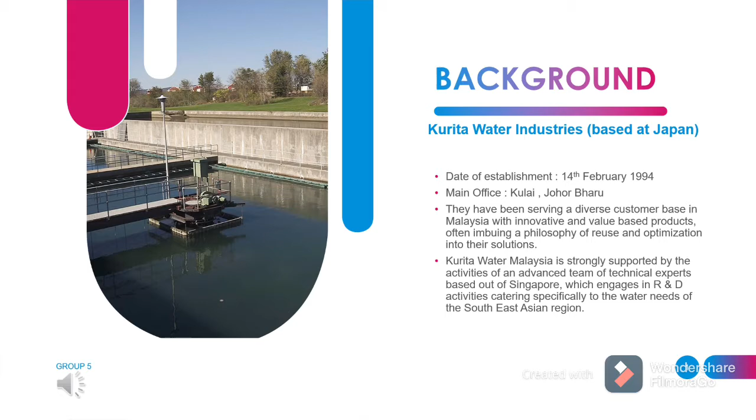KURITA Water Malaysia is strongly supported by the activity of an advanced team of technical experts based out of Singapore, which engage in R&D activity catering specifically to the water needs of the Southeast Asian region.

So now we move to the first process for the water treatment plant, which is water intake. The water for the water treatment plant is taken from the nearest local river, lake and reservoir. The purpose of an intake system is to reliably deliver an adequate quantity of water of the best available quality. An intake system must possess a high degree of reliability and be able to supply the quantity of water demanded by a water utility under the most adverse conditions.

For a large capacity water treatment plant, a detailed survey including hydraulic calculation, mapping, pumping station, source of power supply and other scope have to be done for designing the intake plant.

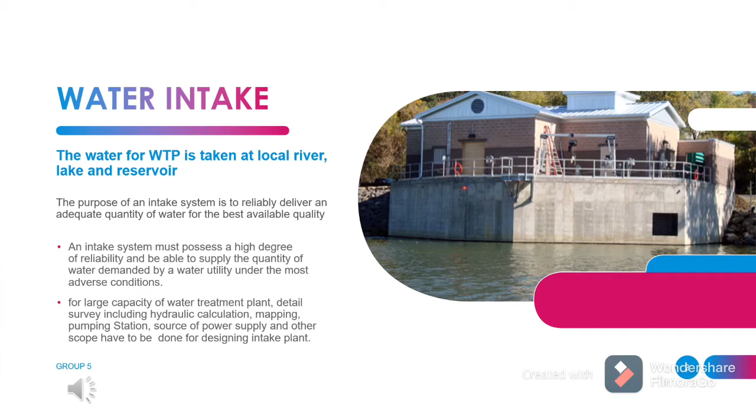So now we talk about aeration of the KURITA company. Aeration is often the first major process at the treatment plant. Aeration brings water and air in close contact in order to remove dissolved gases, such as carbon dioxide, and oxidize dissolved metals. During aeration, constituents are removed or modified before they can interfere with the treatment process. Constituents commonly affected by aeration are volatile organic chemicals such as benzene, which can be found in gasoline, ammonia, chlorine, carbon dioxide, hydrogen sulfide, methane, iron, and manganese.

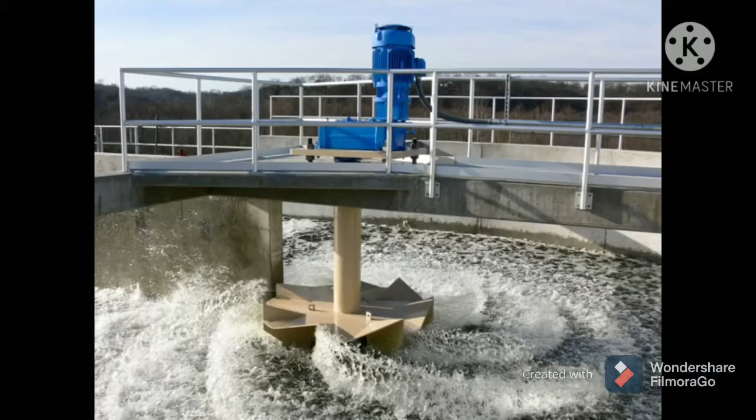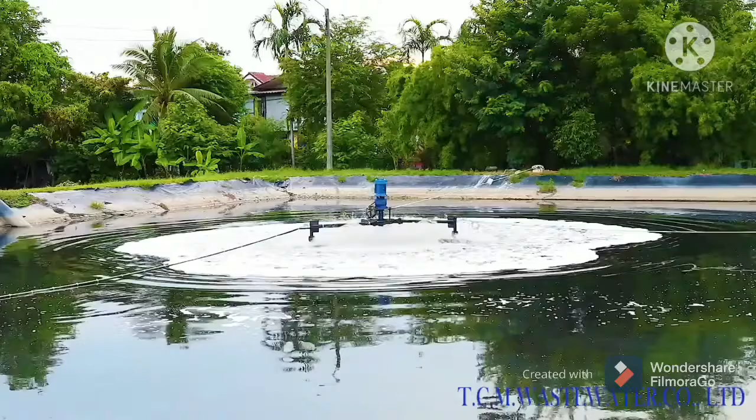This is the aerator that KURITA company uses. The surface aerator pushes water from under the water surface up into the air. Then, the droplets fall back into the water, mixing in oxygen. The jets of water break the surface with varying degrees of force. Aeration brings water and air in close contact by exposing drops or thin sheets of water to the air or by introducing small bubbles of air and letting them rise through the water.

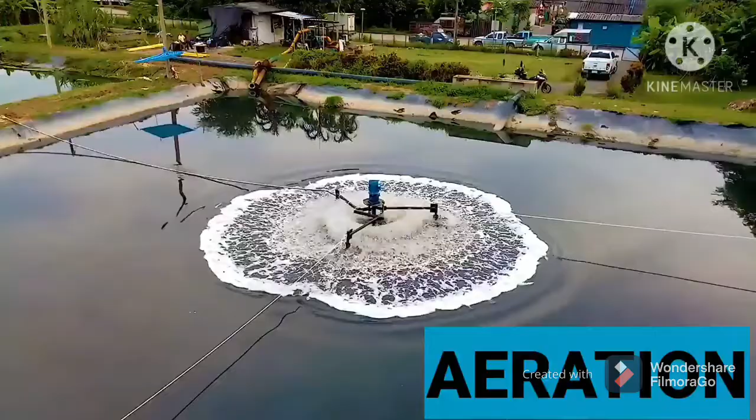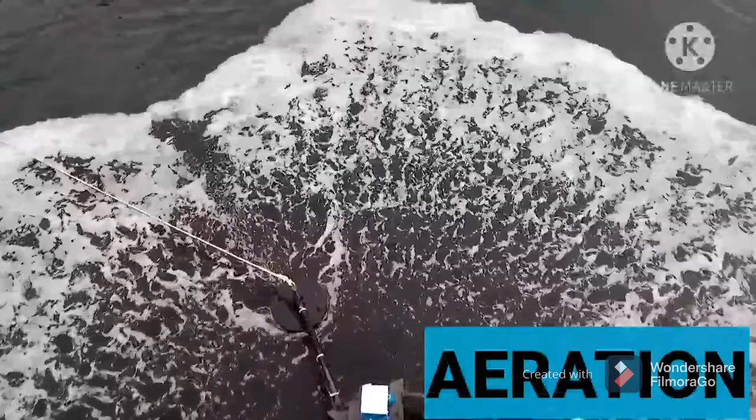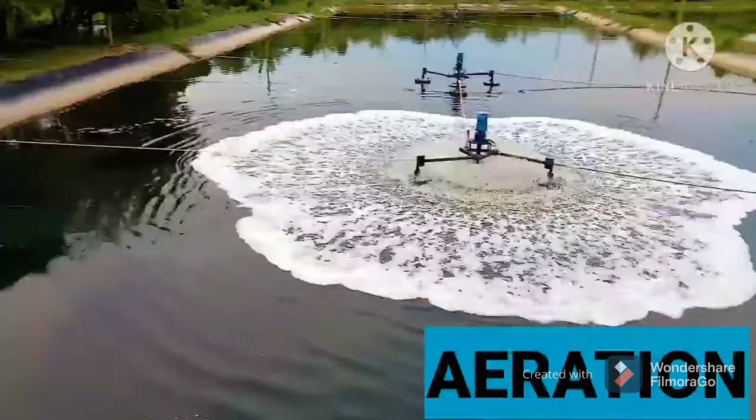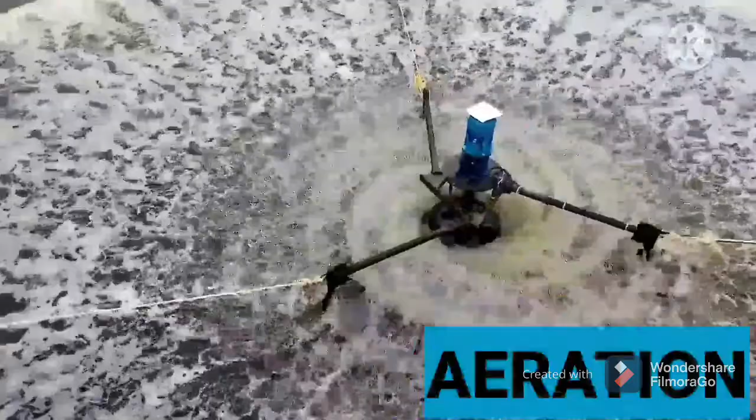The scrubbing process caused by the turbulence of aeration physically removes dissolved gases from solution and allows them to escape into the surrounding air. Aeration also helps remove dissolved metals through oxidation, the chemical combination of oxygen from the air with certain undesirable metals in the water. Once oxidized, these chemicals fall out of solution and become particles in the water and can be removed by filtration or flotation. The efficiency of aeration depends on the amount of surface contact between air and water, which is controlled primarily by the size of the water drop or air bubble.

The next process is coagulation. For the coagulation process, KURITA company proposed a water treatment chemical, KURITA ZE, to promote the coagulation effect of the chemicals used at the plant. Coagulation is a process used to neutralize charges and form a gelatinous mass to trap particles, thus forming a mass large enough to settle or be trapped in the filter.

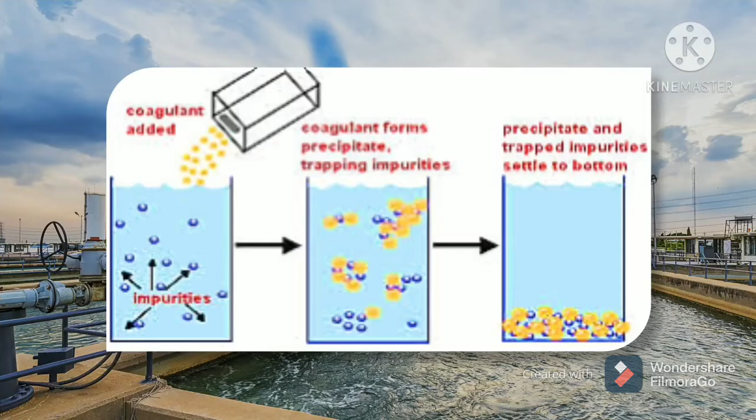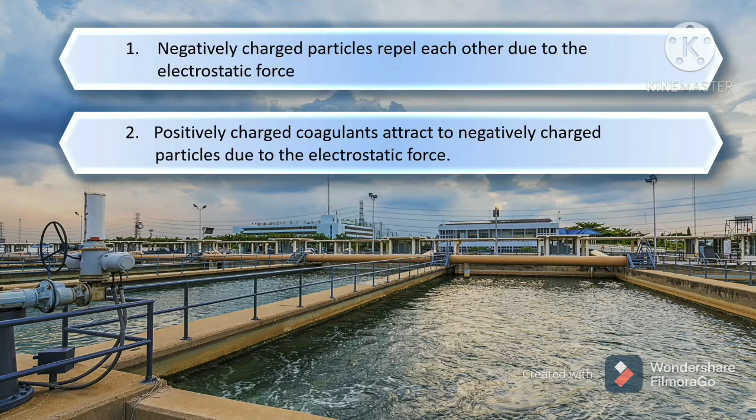Coagulation destabilizes the particles' charges. Coagulants with charges opposite to those of the suspended solids are added to the water to neutralize the negative charges on dispersed non-settleable solids such as clay and organic substances. Once the charge is neutralized, the small suspended particles are capable of sticking together. The slightly larger particles formed through this process are called microflocs and are still too small to be visible to the naked eye.

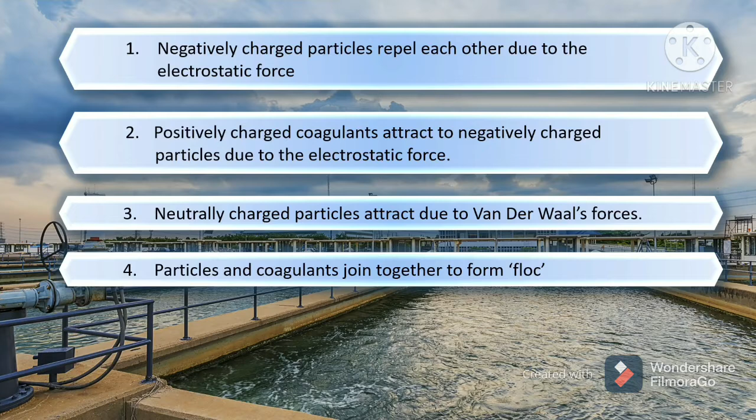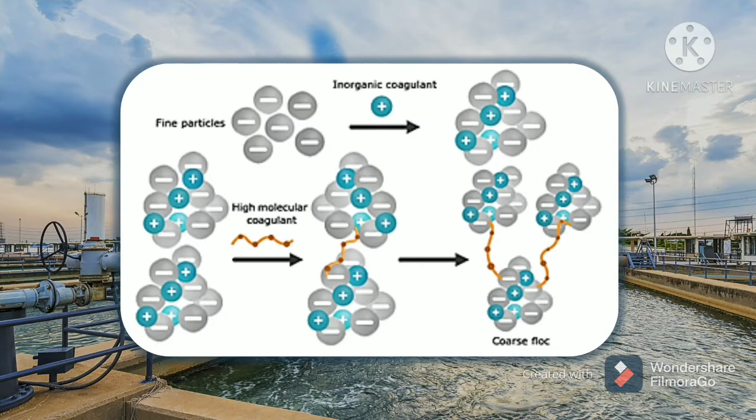A high-energy rapid mix to properly disperse the coagulant and promote particle collisions is needed to achieve good coagulation and formation of the microflocs. Overmixing does not affect coagulation, but insufficient mixing will leave this step incomplete. Proper contact time in the rapid mix chamber is typically 1 to 3 minutes.

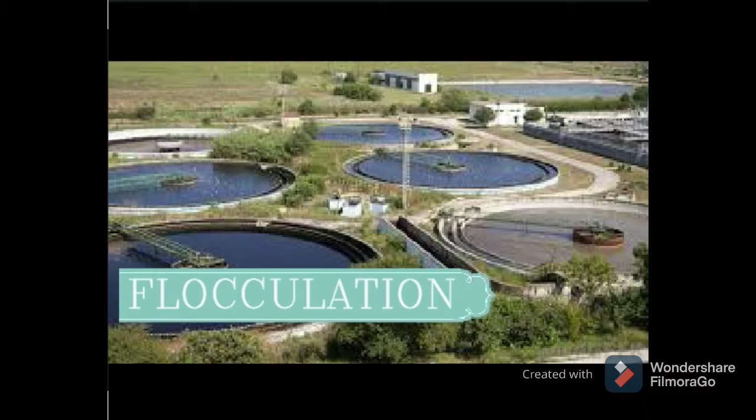In this video, I want to explain about flocculation, sedimentation and filtration.

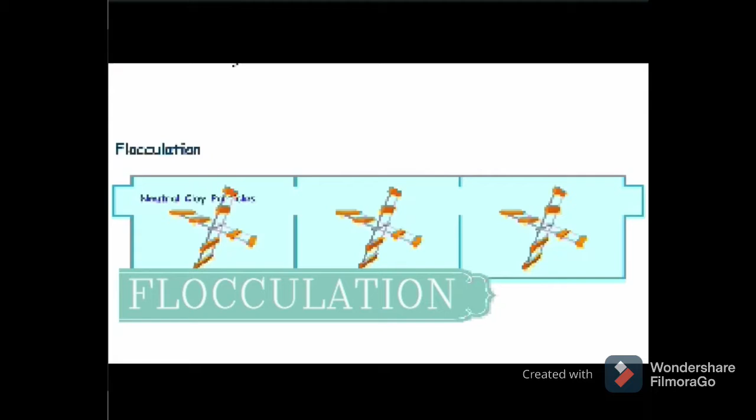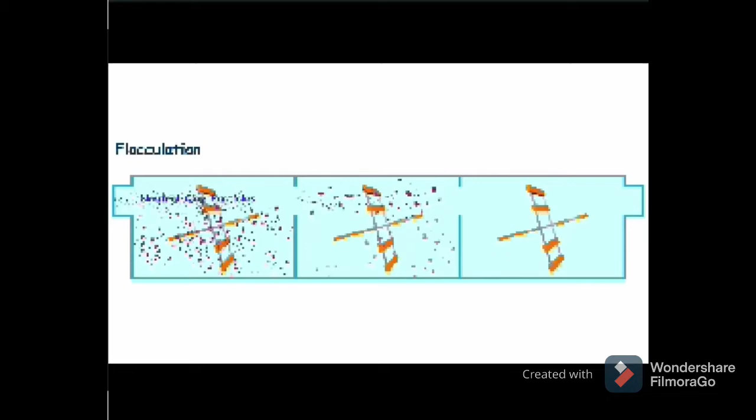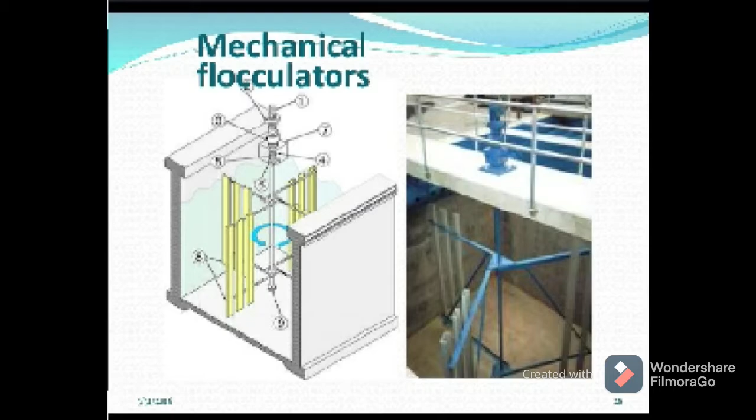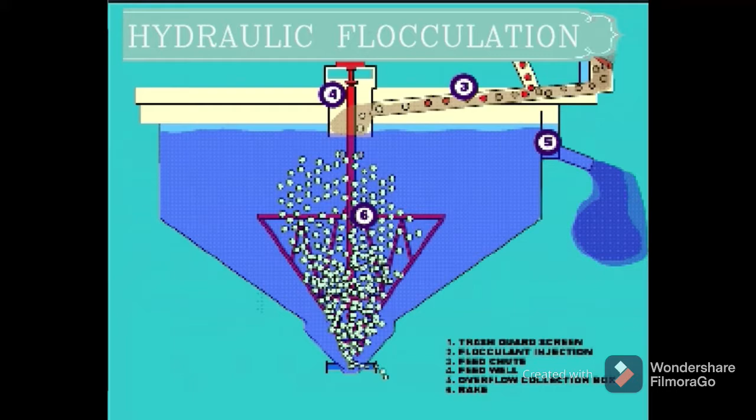First, I will explain the flocculation process. Flocculation is a process where particles stick together to form a floc due to the chemical reactions from coagulation. Flocculation is a slow mixing process because it relies on turbulence to form a floc. There are two types: mechanical flocculation and hydraulic flocculation. For KURITA water, hydraulic flocculation is used because it is simplest to construct and operate.

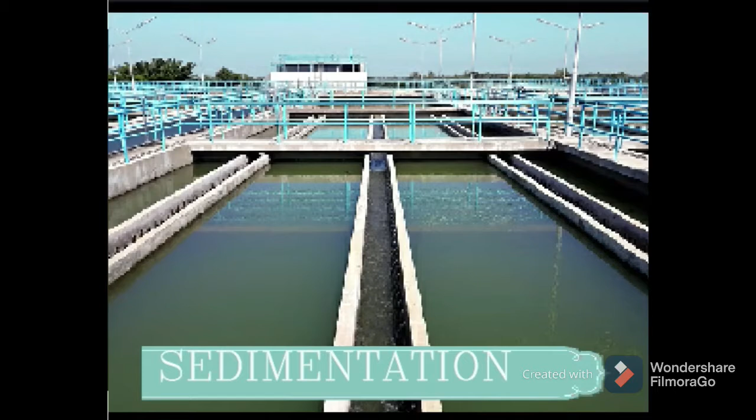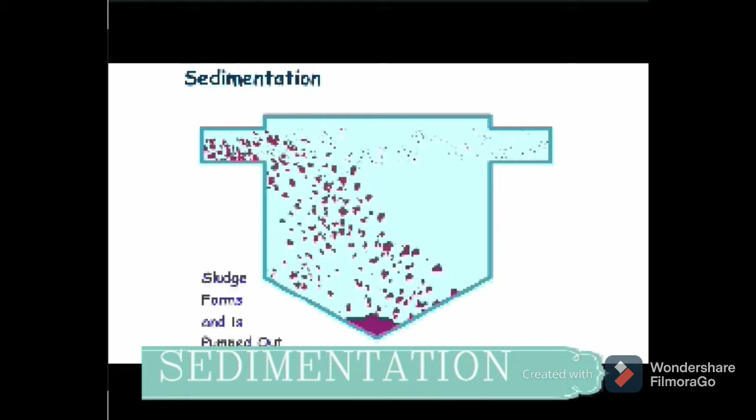The next process is sedimentation. Sedimentation is a process where suspended material from the flocculation process is removed. It depends only on gravity. There are three types of sedimentation: type 1, type 2, and type 3.

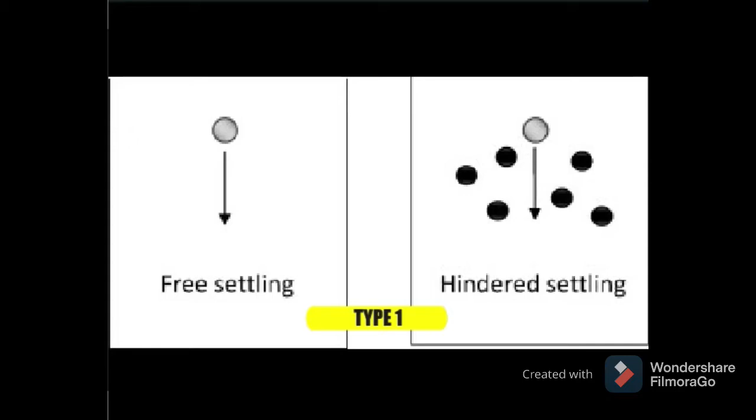In type 1, particles tend to settle as individual particles without colliding with other particles. There is no change in size and shape in type 1.

Type 2 sedimentation is where particles are in the middle of flocculating. It happens when particles start to change to different sizes and shapes.

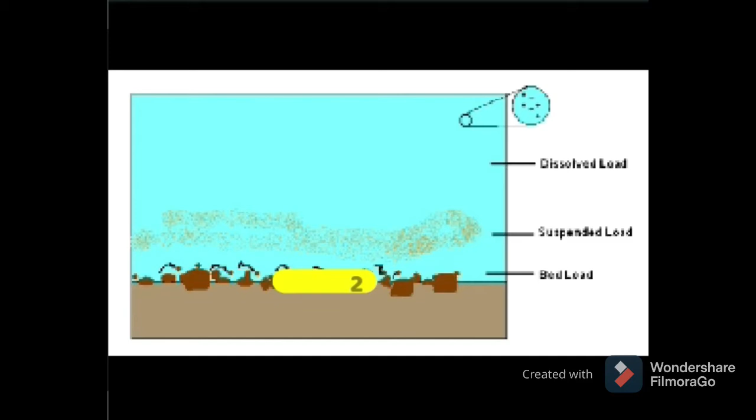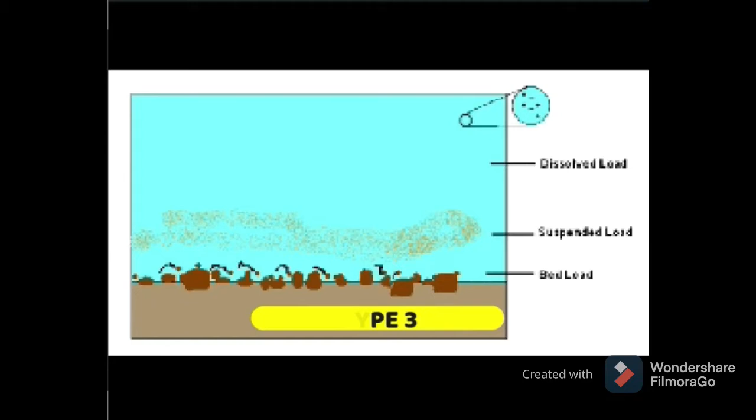The last type is type 3, where the particles have changed into a bigger size and shape and will sink to the bottom of the tank. This happens because of the higher concentration of particles, causing a layer called a blanket to form at the bottom.

The next process is filtration. Water from the sedimentation process passes through a filter made of sand. The floc and impurities that are bigger than the sand get stuck, producing clean water.

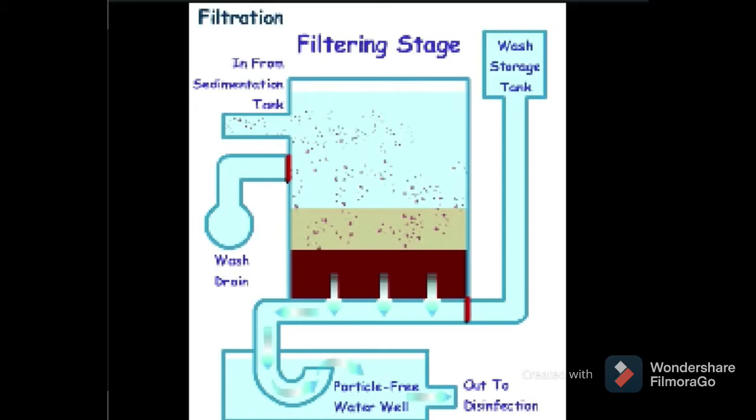There are two types of filtration: pressure filter system and gravity filter system. In a pressure filter system, water passes under high pressure through a closed cylinder.

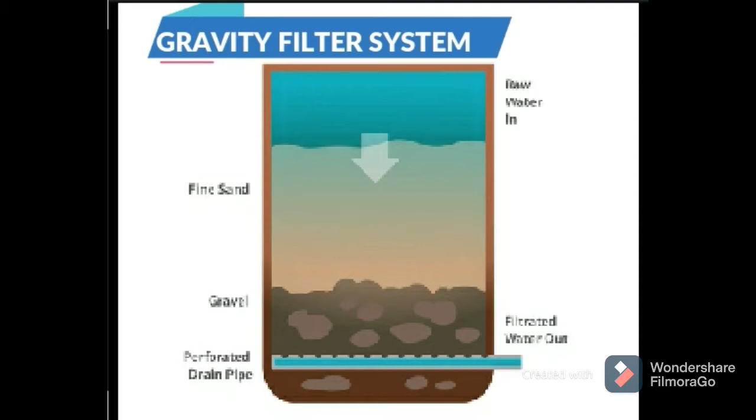In a gravity filter system, there are two types of filter: rapid sand filter and slow sand filter. The rapid sand filter's capacity increases by increasing the size of the sand grain. There are two operations in the rapid sand filter: filtering and backwashing mode.

In filtering mode, water is applied to the top of the filter and flows downward. In backwashing mode, it is used to clean the rapid filter so it becomes more efficient.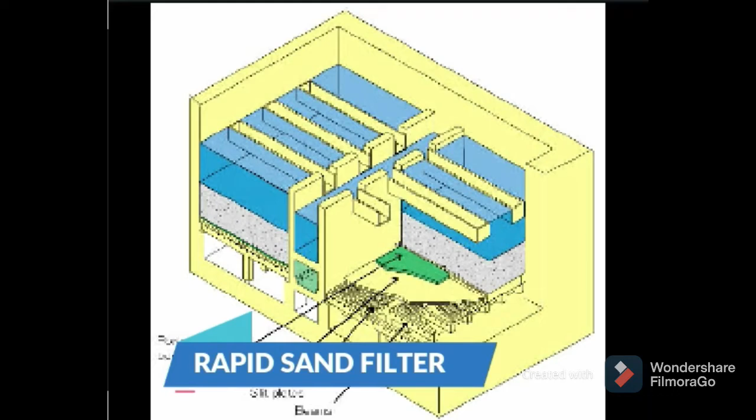The water cleans the filter and erodes solids from the filter medium, expanding the filter bed and transporting the solids towards the backwash trough. A slow sand filter is where water passes through the sand slowly.

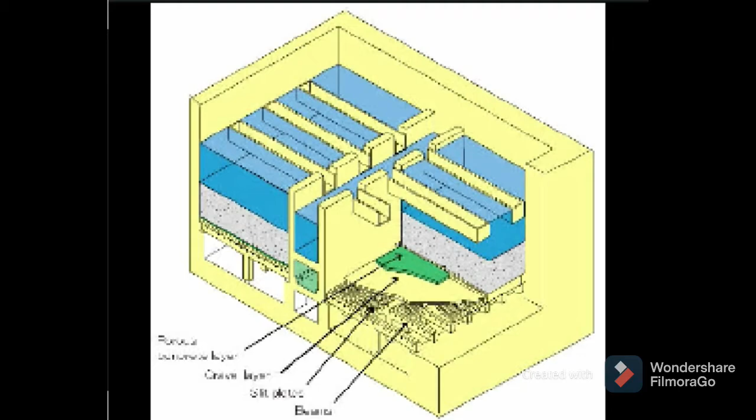Disinfection is the process which involves the elimination of most pathogenic microorganisms on inanimate objects. Chemicals used in disinfection are called disinfectants. Different disinfectants have different target ranges, and not all disinfectants can kill all microorganisms. The important thing is to minimize the number of organisms in the population worldwide. The method of disinfection is used internationally for the safety of humans to decrease the scale of disease transmission.

Common disinfectants include aldehyde, alcohol, and phenol. 70% aqueous alcohol is more effective at killing microbes, and 70% ethyl alcohol is used as an antiseptic on skin.

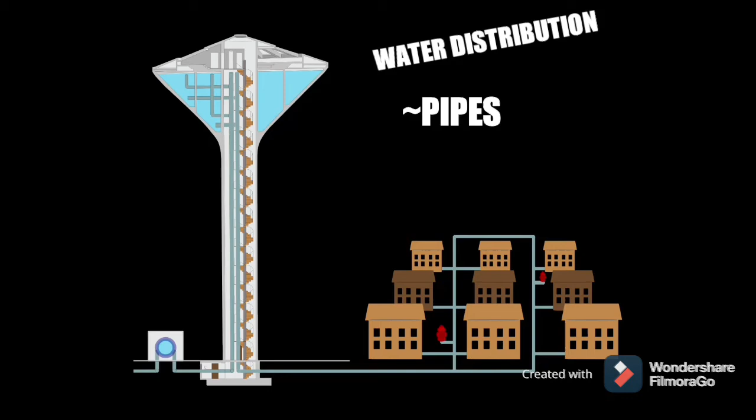Water distribution. A water distribution system consists of an interconnected series of components. They include pipes, storage facilities, and components that convey drinking water. Public water systems depend on the distribution system to provide an uninterrupted supply of

pressurized, safe drinking water to all consumers. Distribution systems may carry water either from the treatment plant to the consumer, or from the source to the consumer when treatment is absent.

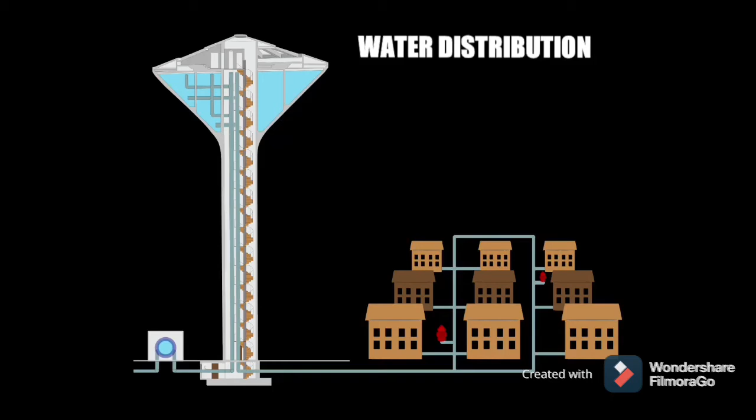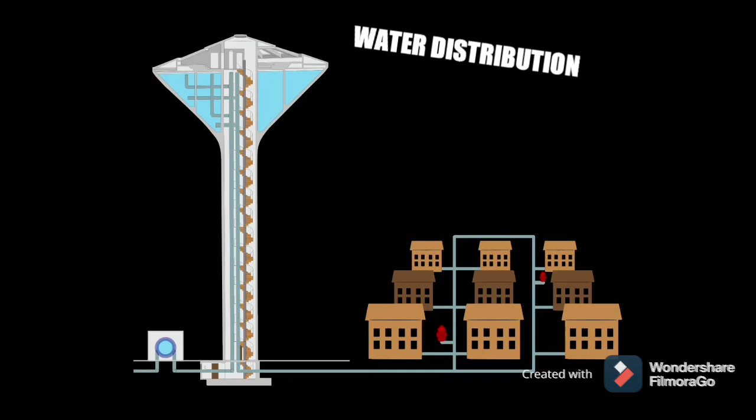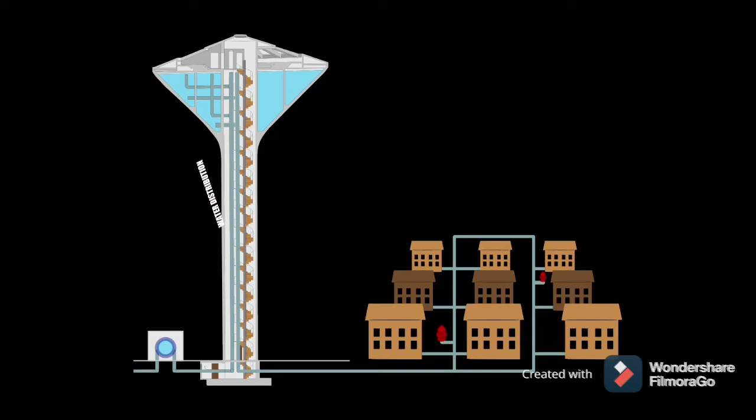Water quality and the distribution system: new pipes are added to the distribution system as development occurs. This addition results in a wide variation in pipe size, material, and method of construction.

Lastly, my suggestion to reduce water usage is to install low flow features to save water. You can save water and money by installing a low flow toilet, shower head, and faucet for a household of 4 people. This means over 100,000 liters of water saved per year.

Second, turn off the tap while washing your face, brushing your teeth, and shaving. And lastly, save leftover ice.

Have leftover ice in a bowl or cup. Instead of dumping it in the sink, let it melt and use the water to hydrate your plants or drink it yourself. Thank you.